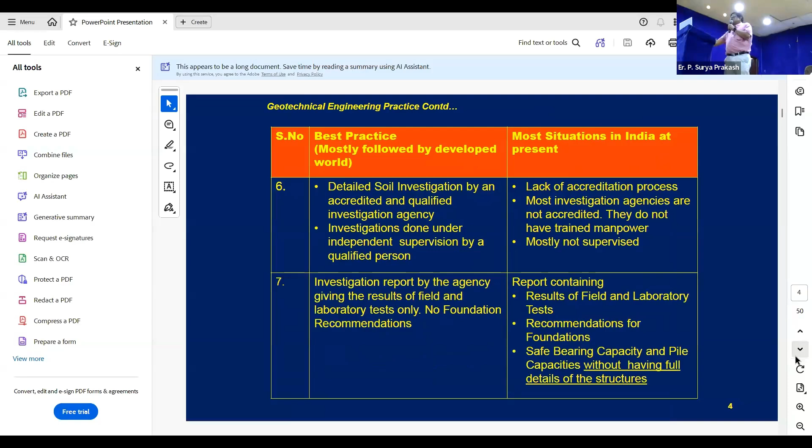Next is the evaluation of the performance of structures built based on the available soil investigation data. Whoever has given the design should have settlement observations, which is slowly picking up in India, but I would say it's like 1/10 or 1/15 of the total structures where the performance has been monitored.

It helps in both ways. One is further optimization—whether the correlations used are valid, or how to further optimize—can only be done based on that.

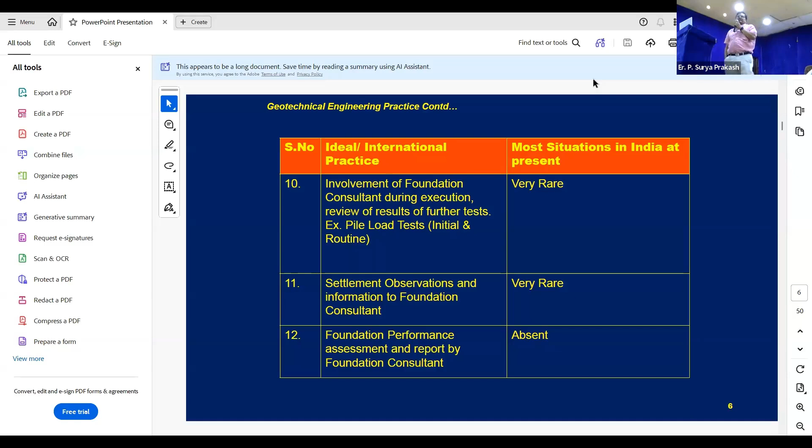So this slide gives a summary of whatever I told you in the earlier few slides—the quality of the equipment used, how to obtain samples at the site, and the type of SPT, standard penetration test. All of us know how important that N value is for doing the correlations.

Whatever correlations in respect of soil modulus, cohesion, or angle of internal friction we get is all from the SPT N value. But how accurate are we getting that?

Now, code is also mandating that you should use auto trip hammers, which lift to the standard height required and ensure free fall. Slowly, companies are getting used to it, and many of them are doing proper SPT tests.

One more method gaining popularity is the electric cone penetration test, where there is no manual interference—it is all automated. Just a cone is pushed through the ground, and it gives you the friction ratio, which can be converted into SPT N. It also measures the water table.

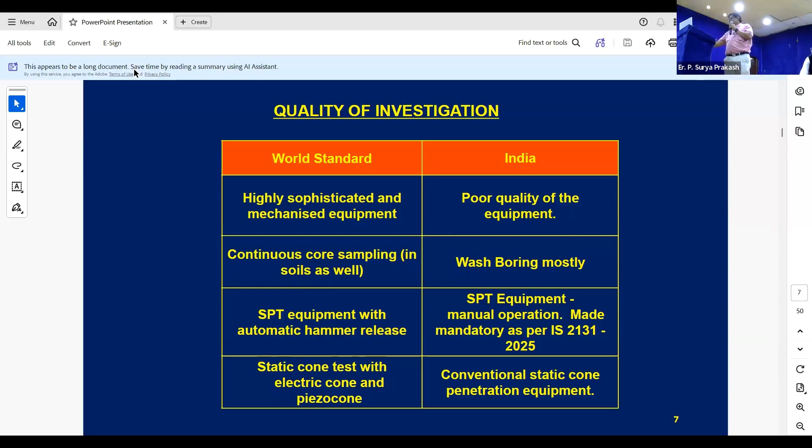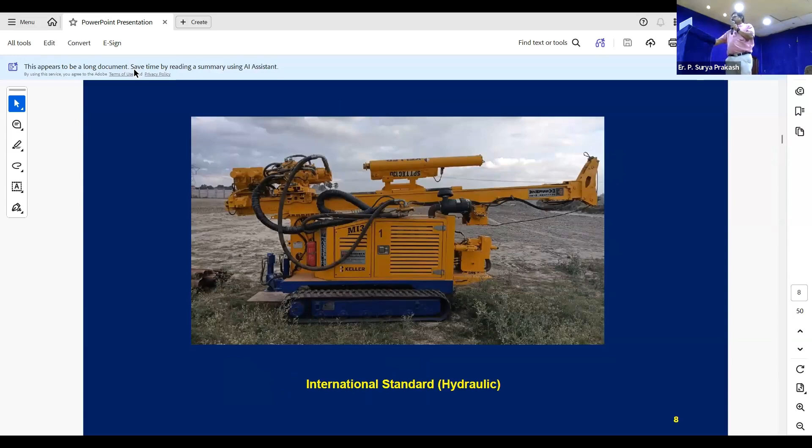So this is for boreholes, with an auto trip hammer where you get the SPT N values. Then this is a typical electric cone penetration test.

I will quickly show one example of what we have done very recently for one of our big projects in the National Capital Region. That soil investigation report came to our review.

Everybody knows how an SPT is done, how electric cone penetration test is done, how vane shear test is done, what procedures are adopted. But half of the report was just giving what is there in standard textbooks or IS codes, the procedure being adopted.

Then the general geology of the site. Whatever report we see, it is a standard thing. If it's in the Gangetic plain or Yamuna belt, they give the standard cut and paste, everything which has really no essence of what is needed for this particular site.

Then they give borehole diameter as 100/150 mm. We asked what he actually used, 100 mm or 150 mm. They said for the top 3 meters they used 150, thereafter reduced to 100 mm. Similarly, they write use of both calyx and hydraulic rig. We asked which one he actually used. One borehole was done using hydraulic rig, balance using calyx rig.

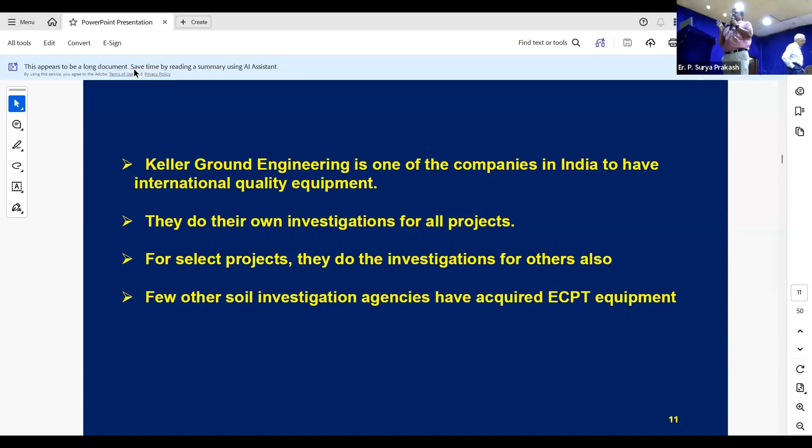So whatever is written in the report does not reflect what is actually being done at the site. The standard size of equipment that needs to be used is not being used. If that goes that way, then the output also is expected to be in the same way.

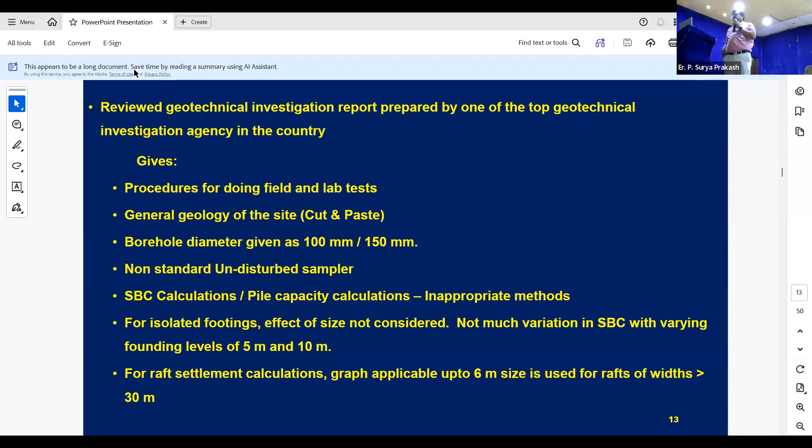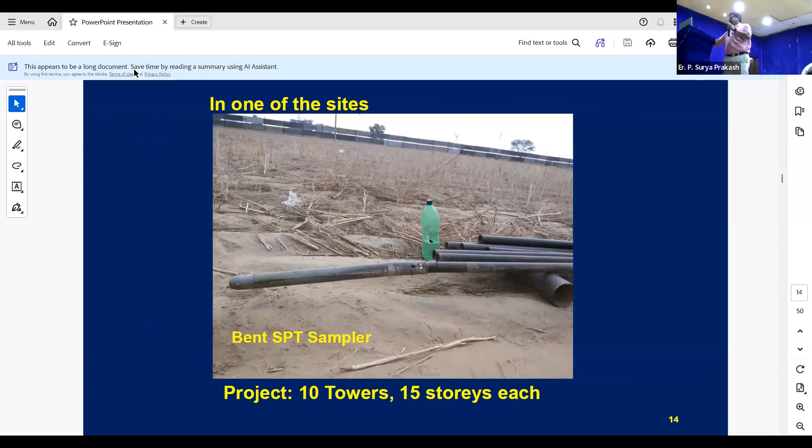So we will start with one of the case studies where Professor explained it. This is for the foundations for the Shri Ram Mandir.

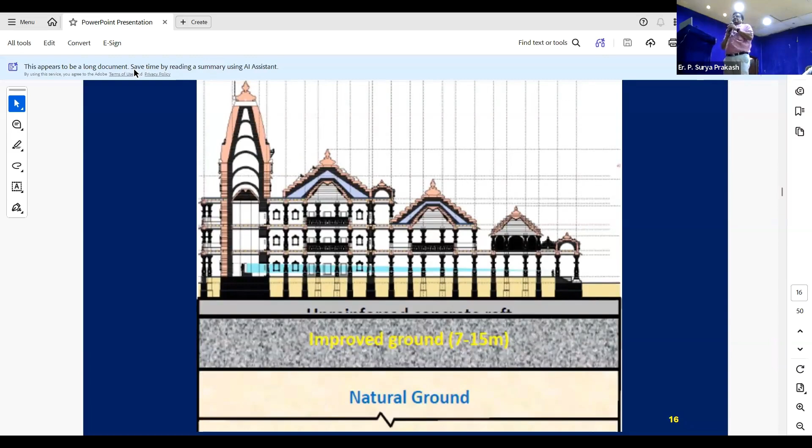This is the typical section where there was a fill up. Most of you must have read about it in journals. There was a fill up about 12 to 14 meters below the Mandir, then the natural ground. The fill may have been built up over years - small temples would have been constructed, lasted 50 years or so, then fallen, and they would level the ground and build again. Over thousands of years, finally this 12 to 14 meters of fill accumulated.

The soil investigation report mentioned it only as fill, for there were reasons for that - they did not want to mention what the fill actually contained. The target life for the temple was about 1,000 years. To avoid corrosion and other aspects, a decision was taken that no reinforcement or any metal would be used.

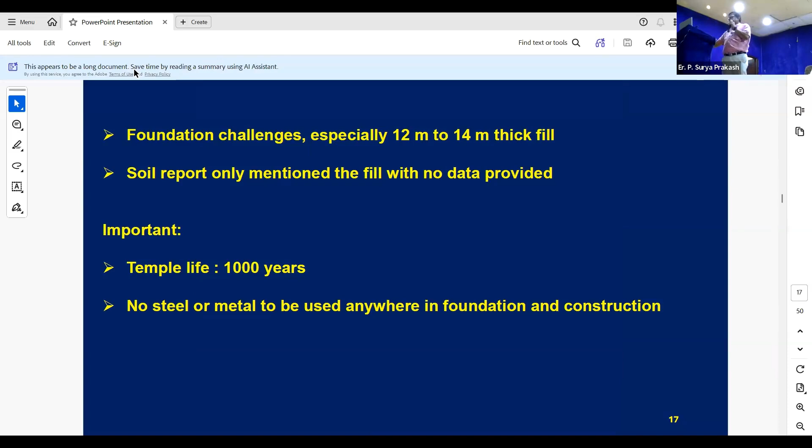A committee of 7 members was formed, with Professor as chairman, along with Professor S.R. Gandhi and Professor T.G. Sitharam. Two options were discussed: one was to completely remove the fill through open excavation and go for roller compacted concrete foundations; the other was to improve the ground using vibro stone columns, since only vibro stone columns would work there. Finally, they adopted the open excavation option, which was done and replaced with roller compacted concrete.

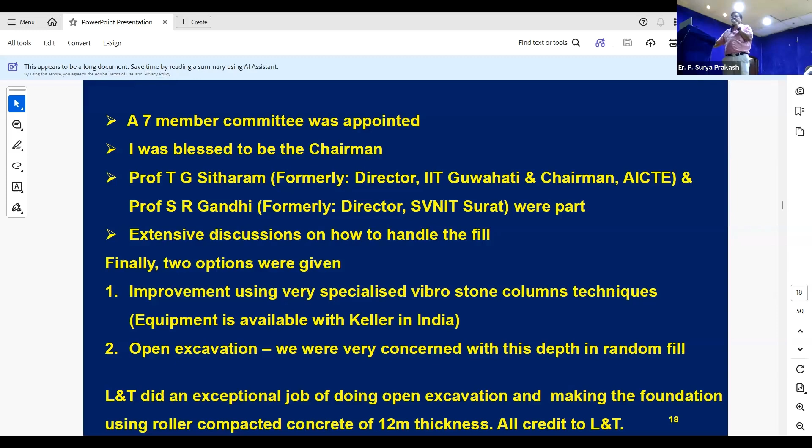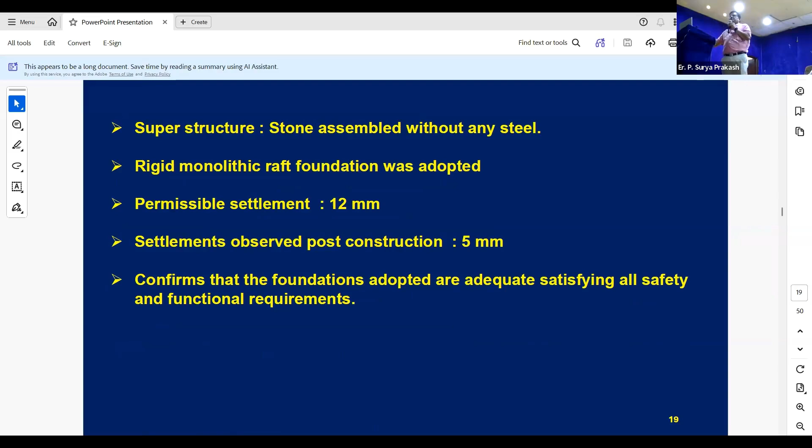The permissible settlement was also very stringent - only 12 mm. But finally, settlements measured using liquid level sensors were observed to be only 5 mm. That confirms, as I was saying, that no settlement observations were usually done, and here it confirms the estimations that were made are validated.

The second example is the Delhi International Airport T3. Initially it was given to L&T on contract using bored cast-in-situ piles, because T2 was on piles. But the strata here is excellent silty sand and sandy silt only. So when it came to our review, we said no piles are required - open foundation in the form of raft is adequate.

They executed it. The main advantage is that everybody knows the difficulties in executing bored cast-in-situ piles - proper cleaning of the bottom of the borehole, ensuring mobilization of end bearing, and all those associated things. Finally, they adopted open foundations and saved 6 months of construction time.

On a 12,000 crore project, saving 6 months of construction time means the interest component savings itself will be very high. And the next good thing is the airport becomes available for use 6 months earlier, so GMR can start making it operational.

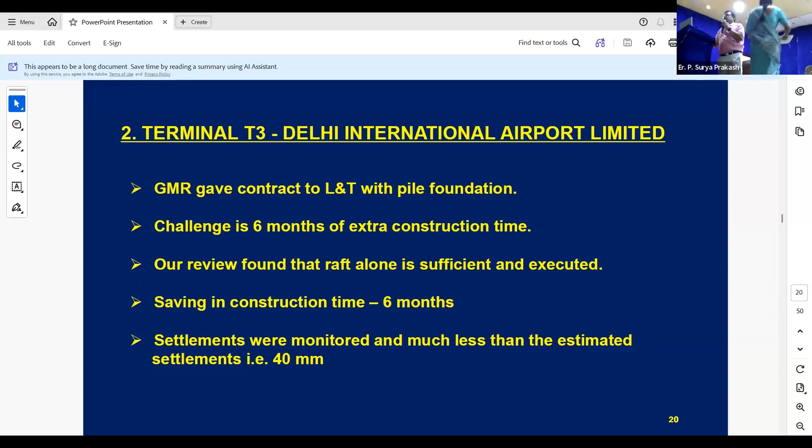Here also we insisted that settlements be monitored. The actual predicted settlement theoretically was 40 mm, but they measured it much less - around 8 mm, or in some cases even 5 mm.

Another example I'll quickly give is for an elevated expressway in Bangalore, running from Electronic City to Silk Board Junction. Initially the piles were 1500 mm diameter, with target design capacity of only 670 tons. As per tender, they had to go at least 1.5 times the diameter into the granite rock. Then two things we did.

One, we reviewed the initial load test. They did one or two tests, and we said you can reduce the diameter to 1.2 - straight away, 1.5 is not needed. Then the socketing lengths were also reduced from 1.5 meters to 0.5 meters.

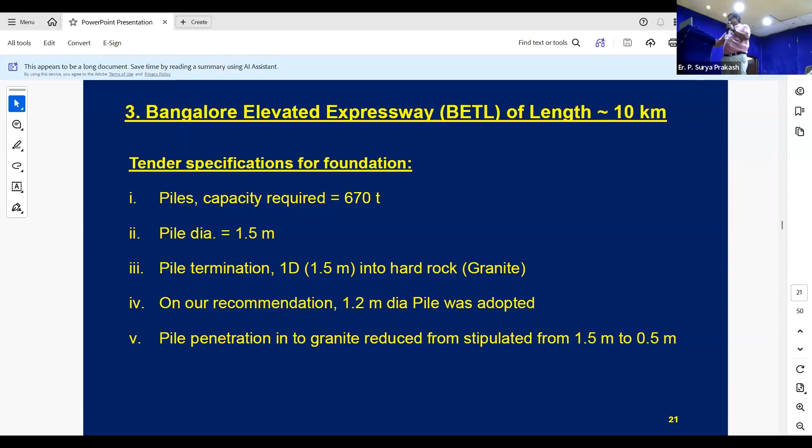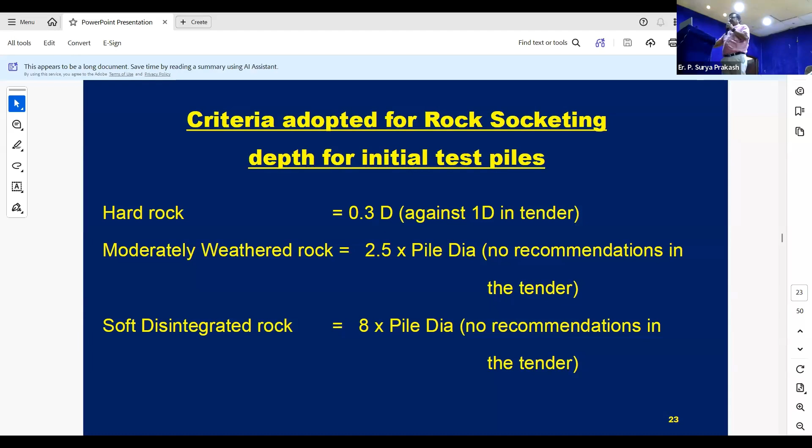This was given initially as per tender - 1D penetration into hard rock - and they did not discuss anything about what should be done in moderately weathered rock or SDR, soft disintegrated rock. Based on these criteria, the piles were adopted and load tested.

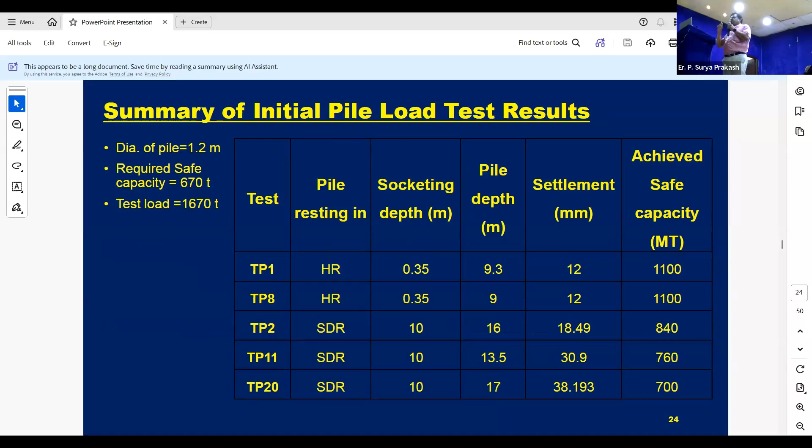As you can see here, for the 670 ton requirement, safe capacity everywhere we got around more than 1000 tons, or 840 tons - minimum is 700 tons. This is with reduced socket length, so the reduced socket length itself was adequate.

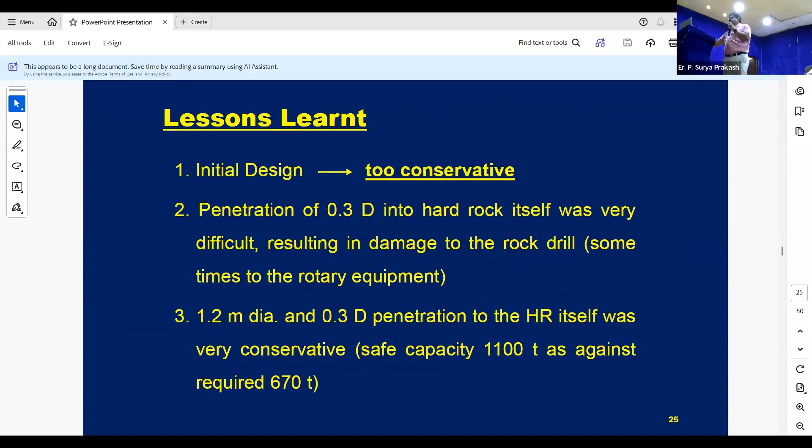This is another interesting case study, for a 51-story building in Gurgaon. As everybody was speaking, nowadays going taller is becoming the norm due to non-availability of land or urbanization. Here first the recommendation was given, since this was done some 10 years back, by a Singapore consultant. He gave the concept of pile-assisted raft with a raft of almost 3,700 meters square, and total number of piles were 345.

Then the owners came to us and said if you have to do that, my project will be delayed by almost 6 to 8 months. Then we reviewed it, but they had a very stringent requirement of the pile-assisted raft settlement to be restricted to 50 mm, even though at that time tall structure code was not there - even then 75 mm could have been allowed.

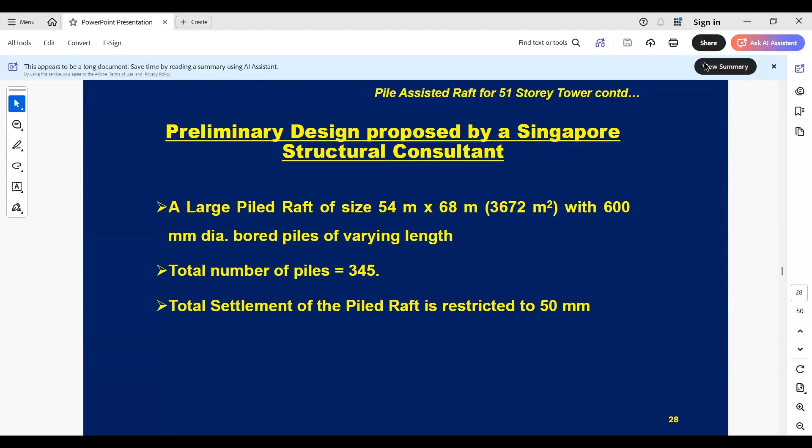After the review, we reduced the raft area by almost half - it's only 1700 meters square. See the number of piles, it was only 94 piles, so it was almost reduced by 70%.

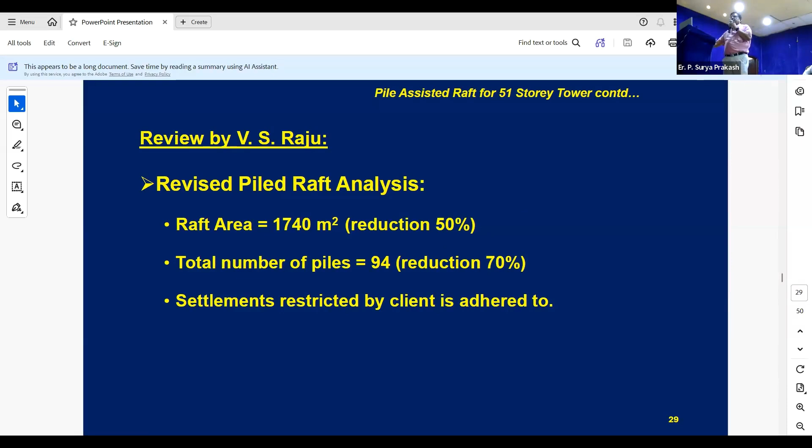This settlement has also been monitored. The predicted settlement was around 48 mm theoretically, but measured was only about 25 to 28 mm maximum observed. So even this is conservative - what we gave is also conservative. Imagine had they done it with double the area of the raft and 70% more piles.

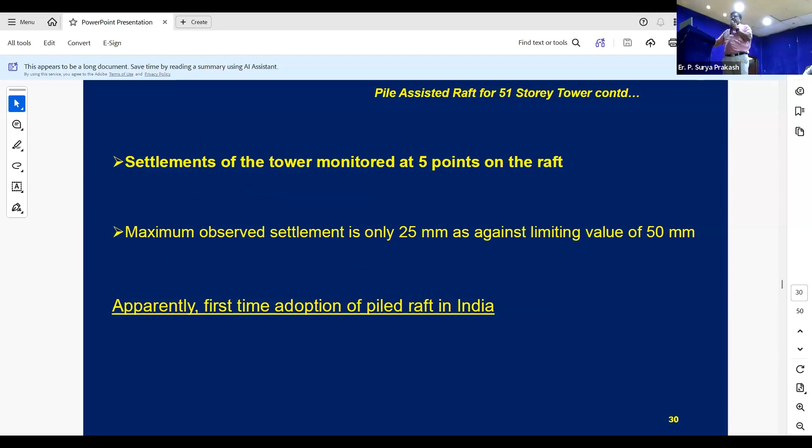One more quick case study, what we did in Bahadurgarh. The recommendations were obtained from the Soil Investigation Agency, because all of us know that Delhi falls under Zone 4, high seismic, just lower than Zone 5.

Liquefaction was an issue because of high water table and loose sands at the top, but the recommendation was given only for bored piles. Then we said, no, you have to do ground improvement. Vibro stone columns were done to mitigate liquefaction, and only then was the raft on top given.

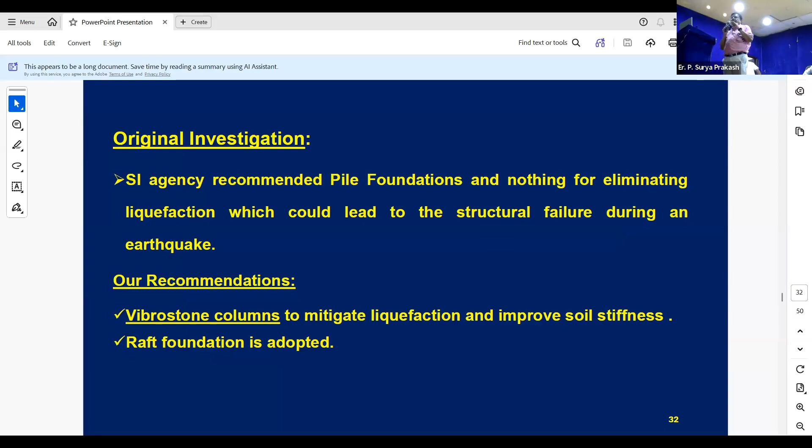Even here settlements were observed. The predicted settlements were close to 70 mm, the measured were around 58 to 60 mm. That means here also we were able to validate the correlation that has been used.

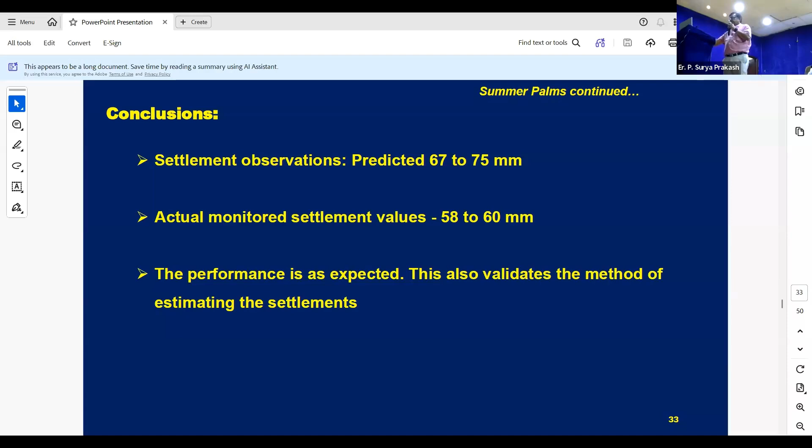So far what I have given is all in the National Capital Region. Since most of you are practicing here, I thought we should give one or two examples of what we did here in Hyderabad. This is for a commercial building in Nanakaramguda. The proposed configuration was 4 basements, meaning 20 meters is the founding level, then 24 upper floors.

Only 3 trial pits were done - I repeat, only 3 trial pits were done. You know the limitation of having trial pits, you can't do deeper trial pits. So it was done only up to 3.7 meters depth, but our founding level is at 20 meters. With this, the recommendation was given for 40 tons per meter square.

When we visited the site the first time, we could even see the rock outcrops, so we decided to adopt a rock foundation. But the constraint in Hyderabad is that it's all jam-packed - one side there are villas, one side a school, and one side a 100-feet road. So you can't blast. How long would you keep doing controlled blasting before finishing the raft?

It's a commercial building. The first thing we said is you don't need a raft. You do 3 boreholes up to a depth of 3 meters below your founding level - meaning if it's 20 meters, just go 3 meters below that - to confirm the continuity of the rock below the founding level.

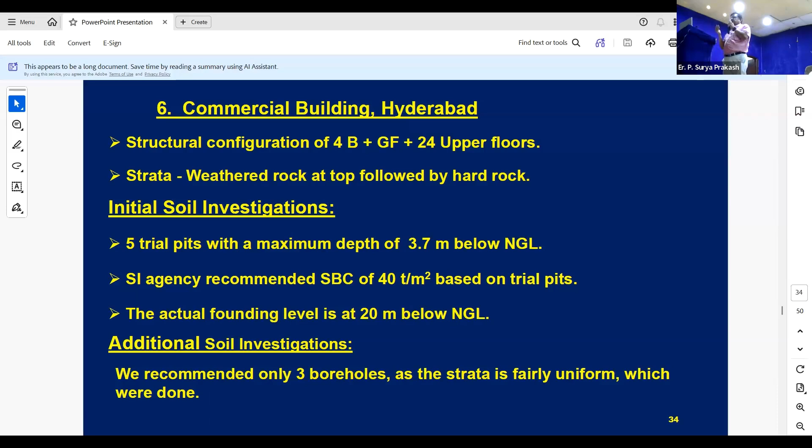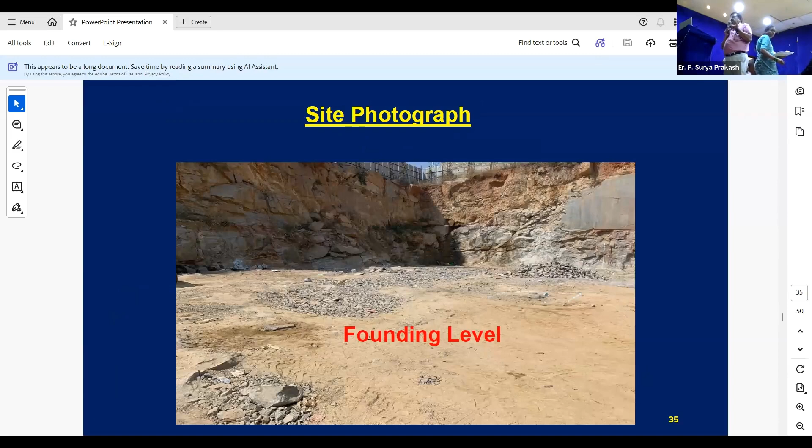All were adopted as isolated footings only, no raft was used. But finally, even based on the structural loads coming through, the structural consultant said he didn't need more than 250 tons per meter square.

One more case study - this is also in Gachibowli, L&T Serene County. This is a site with 30 acres, with 10 towers, all 11 floors. Only 9 or 10 boreholes were done for the entire area.

But later the location of the towers were changed - for some vastu reason, taller towers were moved to the rear and shorter towers to the front. So when it came to us, out of 9 boreholes, only 2 were in the actual location of the towers, because by that time all the towers had been shifted for various reasons.

We were not only the foundation consultants, we were also supposed to visit the site before the raft or isolated footing was laid. For one tower, dimensioned about 75 meters by 30 meters, one-third was on very hard rock where you could go as high as 400 tons per meter square, and one part had murum where we could go up to 80 tons per meter square.

But the most critical part was that one-third of the tower was on soft clay. Imagine an 11-story building put on that. Without catching this, as our MLC was saying, it would have been like a pack of cards - a cascading effect with all the slabs falling one over the other.

So we wanted to know the reason. When we visited the site, this tower was at a higher level, and as we gradually moved out of the site, there was almost a 2 to 3 meter level difference. There was a man-made lake behind this tower, so earlier, before human interference, the water would flow and take its own course from this higher level to the lower level, passing through this area.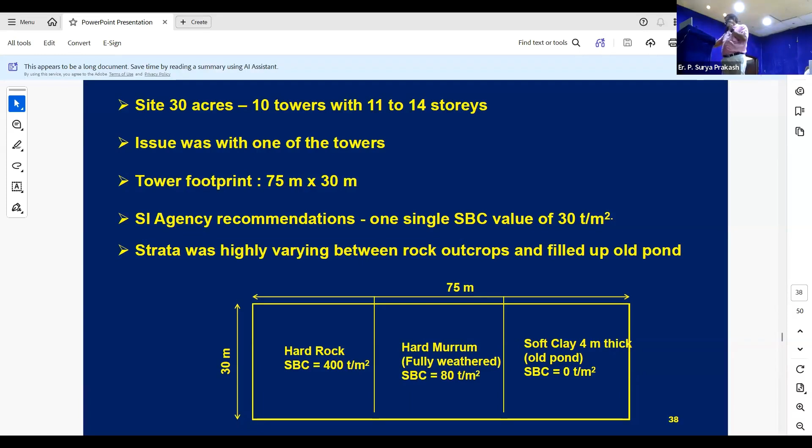One more quick example - moving back to NCR, because most of the tall structures that have come up so far are in the National Capital Region. Same here, initially it was a 30-floor building, and cast-in-situ piles were recommended, but we said you don't need a pile foundation at all.

Then they went for a raft instead. The actual settlement measured was only 30 mm, while what was predicted was only about 40 mm.

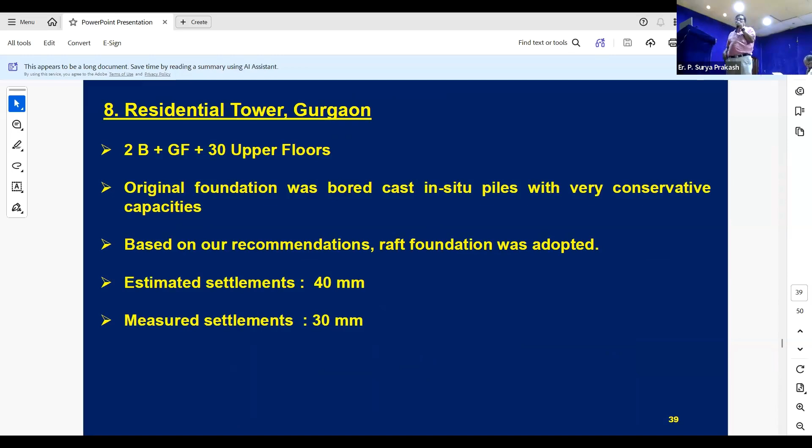This is a very recent project for Isha Foundation in Coimbatore. Nowadays there are so many visitors to the Adi Yogi statue, and they wanted to provide some accommodation for the followers of the Guru there.

Initially, when they came to us, they had in mind to go only up to 4 floors, based on a recommendation from a structural engineer who said beyond 4 floors you'd need to go for piles. But the strata itself is very good strata.

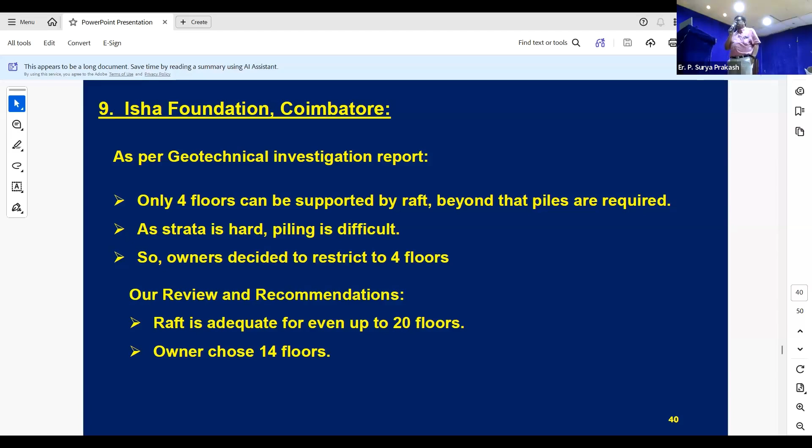It's all murrum, and after a certain depth, rock starts. So doing piles is also not feasible if you want to increase the size. Then we said you don't have to go for anything else—raft foundation is adequate even up to 20 floors. Finally they adopted 14 floors for that same building.

Maybe these are some of the old projects. Yeah, this is quite interesting. This is for another sector—an oil jetty in Tuticorin port, where the strata itself is a weak calcareous deposit sandstone.

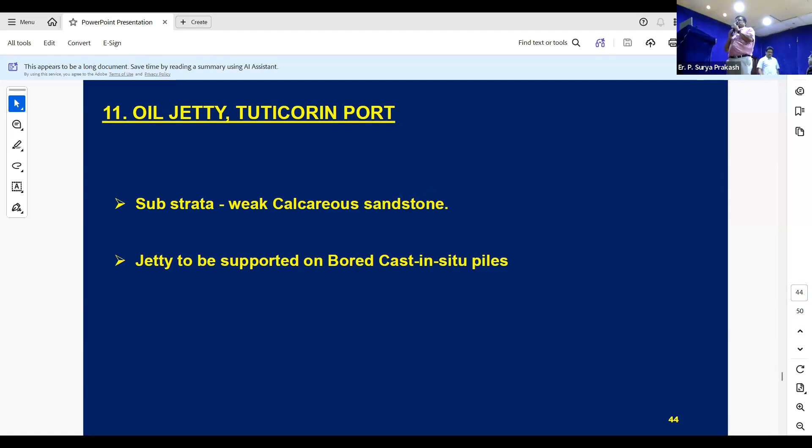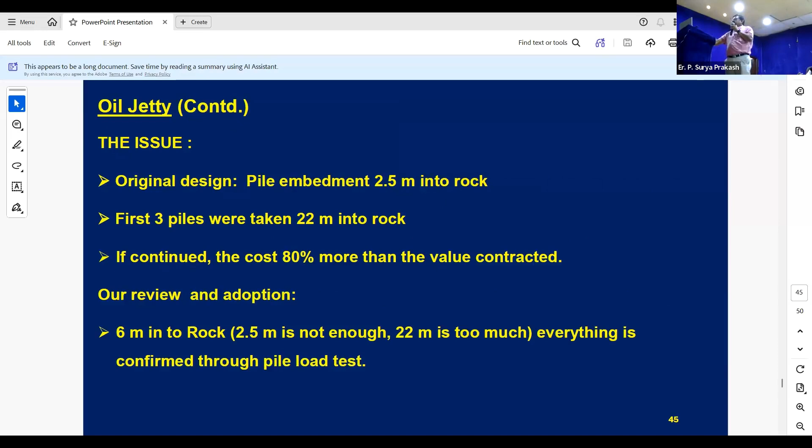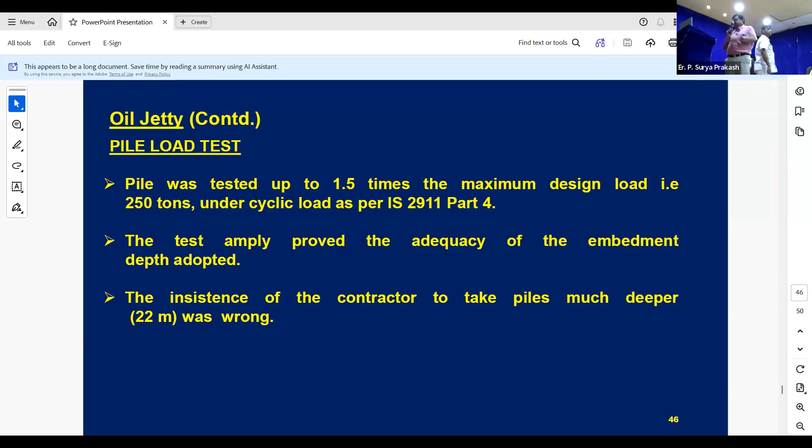I think this is the last project which I wanted to explain to you. This is also for one of the dry docks on the west coast of India, which was recently commissioned. This is a stunning example. There were international consultants also involved in this design, and construction was done by one of the top construction companies of our country. There were 4,200 piles—600 dia, 800 dia, 900 dia, 1,000 dia.

Four diameters they gave; length alone could be varied. Target capacities also were given. For 4,000 piles, how many initial load tests were done? Only 3—one for 600, one for 800, and one for 1,000. They did not do one for 900 dia. Out of those, one failed. The initial pile load test itself failed, but they didn't redo it.

But it's a major dry dock on the west coast. As per IS code, if you have to strictly follow initial load test requirements, there are 2 criteria you have to take care of. One is the diameter, and if the load carrying capacity is changing, the number of tests has to be increased. Just for the number of diameters—4 different diameters—they should have done 10 tests.

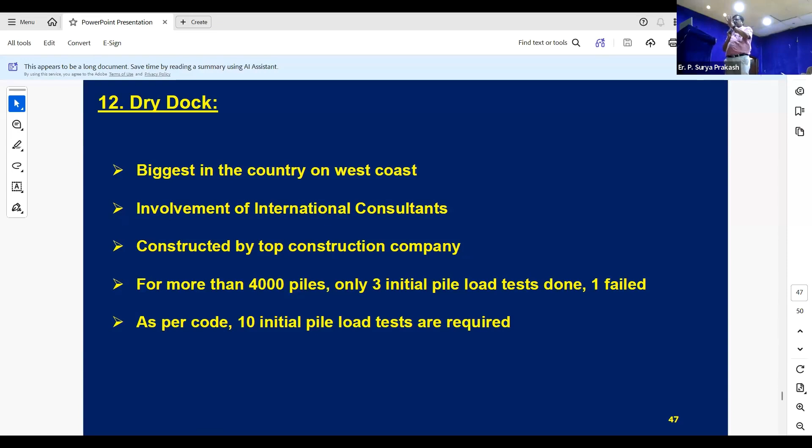Yes, I do agree there are site constraints because the pile cutoff level was 12 meters, but the pile was done from elevation, the original ground level. But one more major mistake they made is they didn't want skin friction to be mobilized for the top 12 meters, because your cutoff level is actually deeper. So they put a double casing pipe around the test pile just so that the skin friction does not mobilize. But that means you are making it a free cantilever for 14 meters.

This free cantilever, the higher the length, structural engineers know more than us how difficult it is to do that. A load of almost 1,000 to 1,100 tons, 2.5 times the design load, has to be applied there, and then they have to do the test. That also was not the appropriate way.

The correct way should have been to do it as a regular pile without any double casing, and then deduct the skin friction for the top 12 or 14 meters, which will not contribute actually to the piles later.

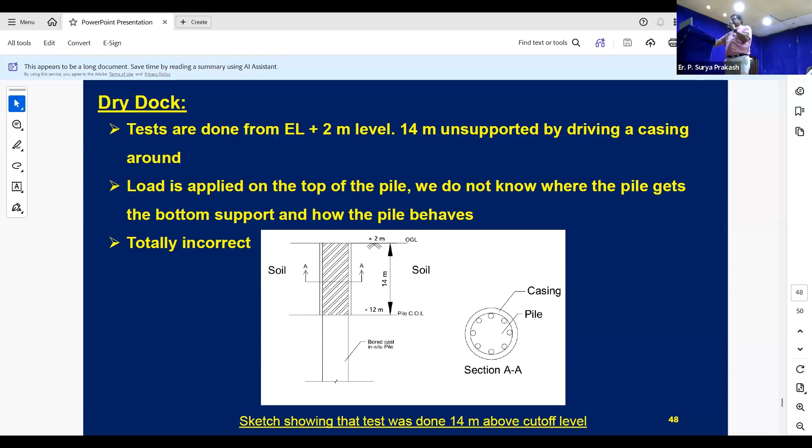Certain other things also—the spacing of piles which was adopted was not correct. The length of pile—because they did only one instrumented pile, based on which they arrived at the shear parameters required for the design—unfortunately that was not correct. So they had taken optimum pile lengths which proved wrong during the routine pile load tests. You can see that they did 40 routine pile load tests, out of which 17 failed.

So later, rehabilitation is always costlier, right? But we managed to do some rehabilitation, and finally the project was delayed by 2 years on such a huge magnitude project. We know what the implications are.

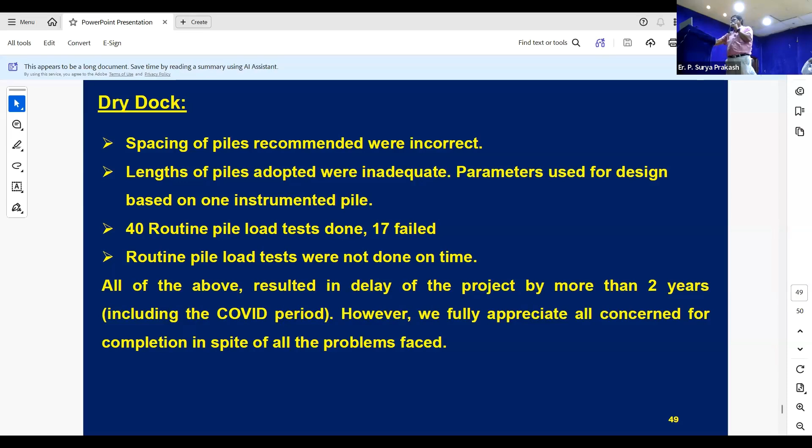Yeah, I think with this, I'll conclude my talk.